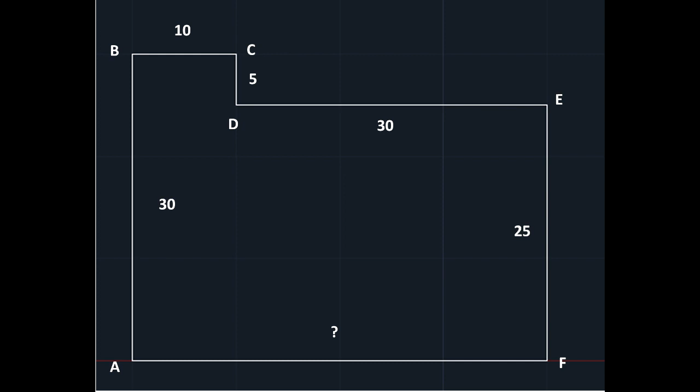We have an exercise here, a second exercise using drawing lines. So we have the coordinates here, and then the sides. First, let's type the letter L.

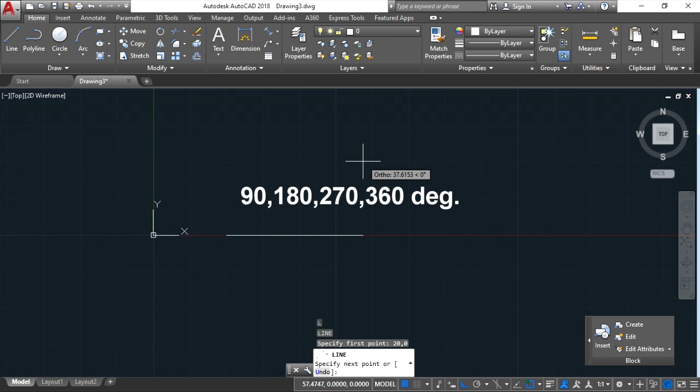Okay, so in our drawing, our point B is upward, and the size of that side is 30. So we orient the cursor upward, then type 30, press enter. Now we have point B here.

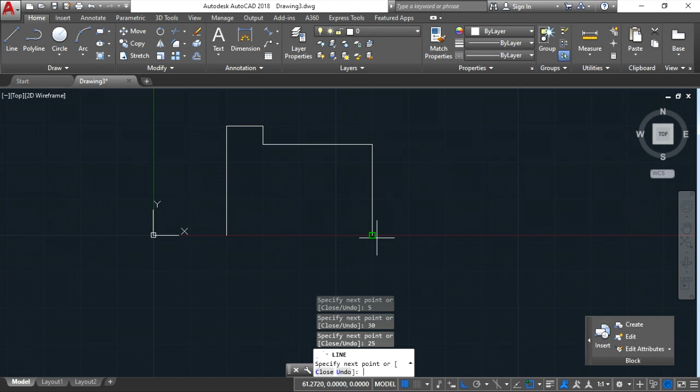Now, to get the dimension, we have it here in annotation. We have dimensions here, and we'll just use this linear dimension to test if our drawing is correct.

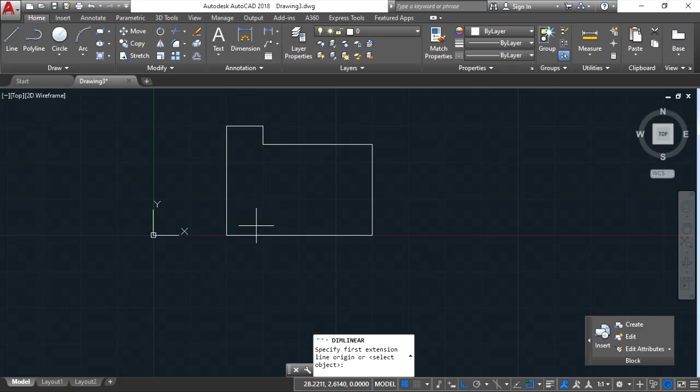So from this point, from A to B, it's 30. You can move it here or there, then right-click to set it into place.

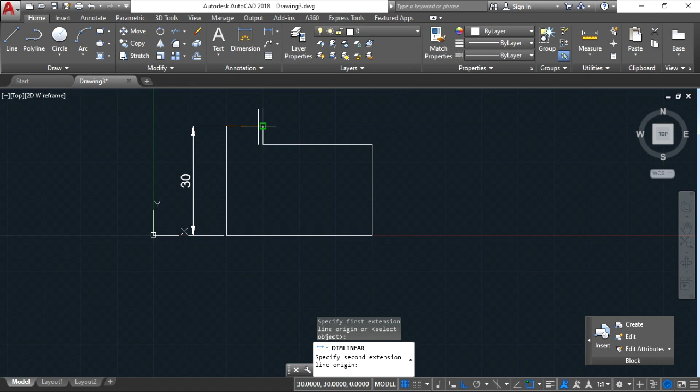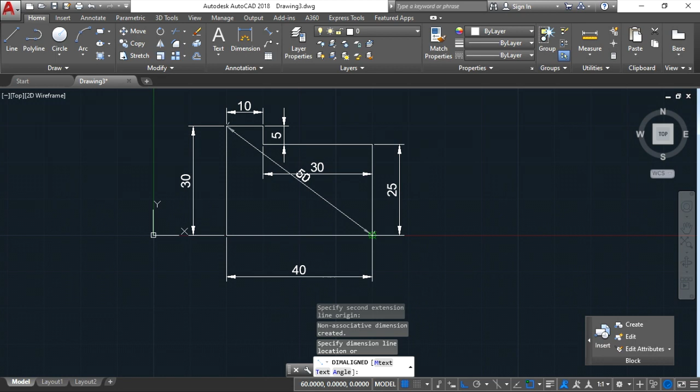So, dimension—this is 40. Now, if what's being asked is the value of the side B to F, we can get that. Let's just click the dimension again and click point B and point F, and we get that the distance is 50.

So using trigonometry, you can use the Pythagorean theorem by squaring 30 plus 40, then taking the square root. It should be 50.

What if we want to know the distance from A to E? We'll just click dimension, and from A to E, we have 47.17. We can also edit our dimensions in units, but we'll discuss that later on. Thank you for listening.